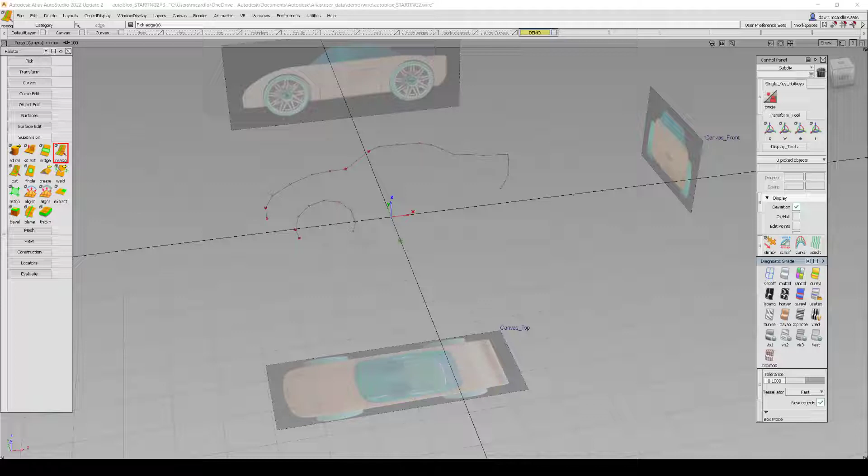I'll start out building the wheels, connecting them with a body side, then the hood, the trunk, then I'll connect all those pieces together for half of the car. I'll mirror it and show you how to do some cleanup and detail work.

So starting out with this curve, I'm going to extrude it, making sure I have curves enabled. I can choose either global or normal within the dialog box, or once I invoke the tool by clicking on the curve, I can do that by switching between global and normal here.

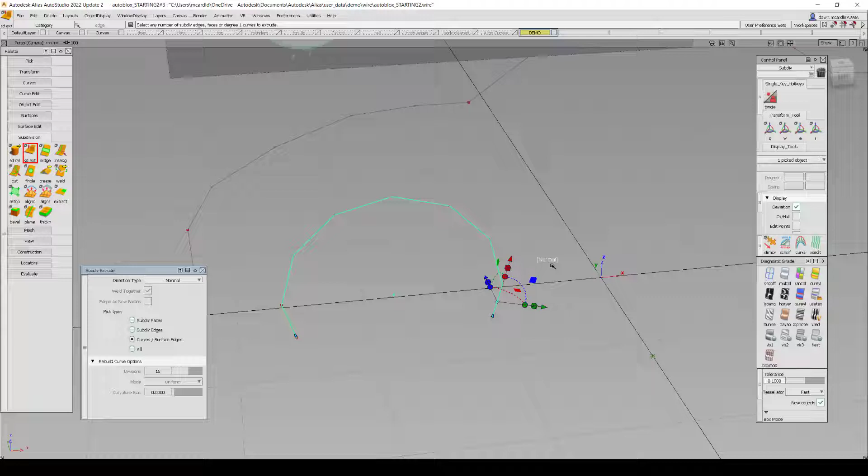In the side view, I'm going to extrude it normal to the curve using the Y direction. So I'll do that once, spacebar, and again, spacebar.

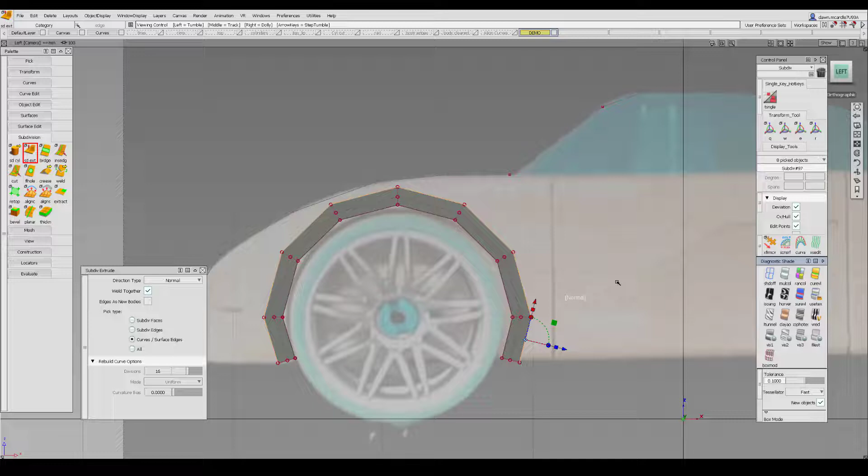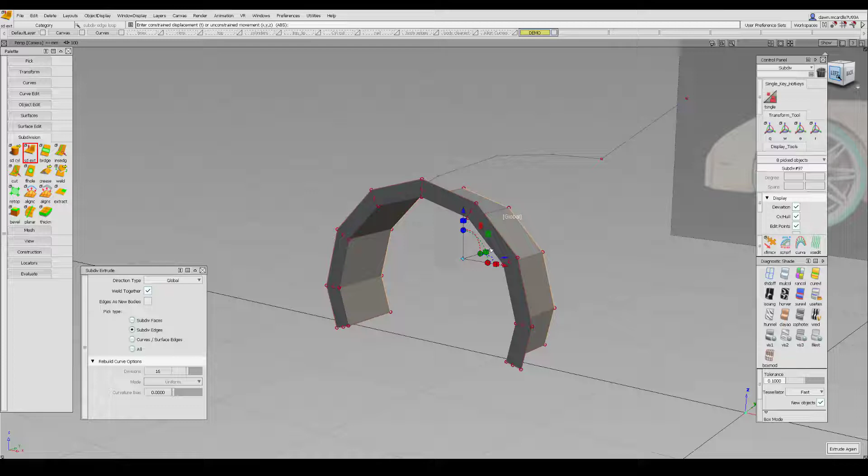I want to continue extruding, but this time I need to select a different edge loop to build the wheel well. So extruding again, I'm going to change this to global, which uses the normal XYZ axes of our world, and I will extrude that back toward the center, checking to make sure it ends where I want it to, and it's not actually built until I hit the spacebar.

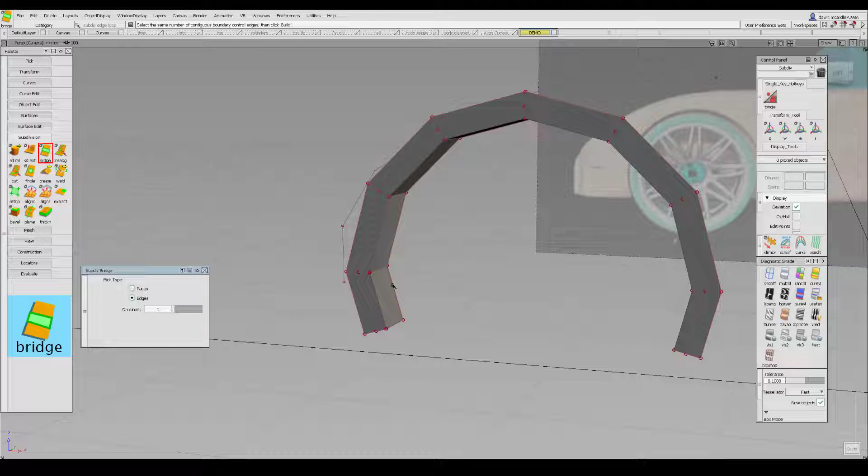To build this back wall behind where the tire goes, I'm going to use the bridge tool. I can do this one at a time, edge to edge, or I can do multiple. So I'm going to select these 3, which I want connected to these 3, spacebar, and now I can select how many divisions I want. 2 is good.

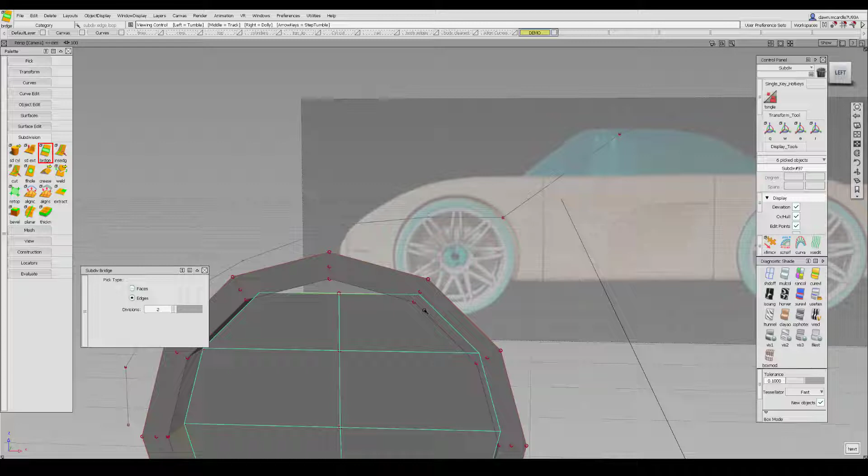And to connect this top hole, I'm going to weld one CV to another using the weld tool. Set to target, I'll select the first one and the second one where I want it to jump to.

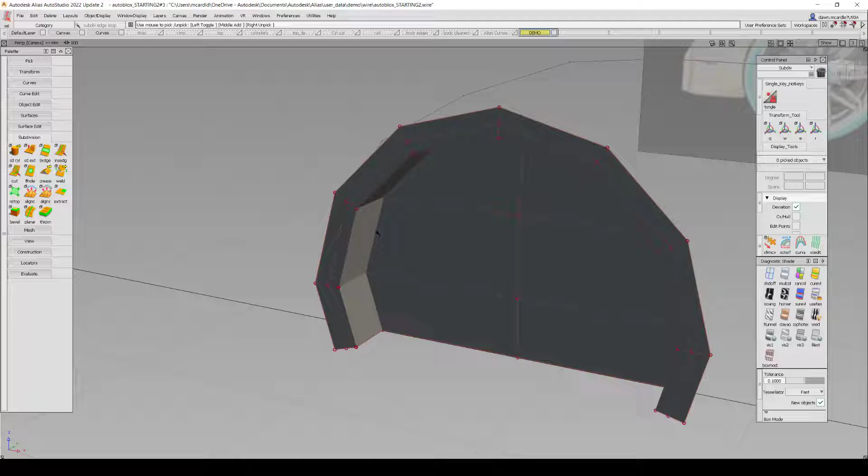Looking in shaded mode, it looks pretty good, but it's too rounded here, so I want to crease it. I'll select this edge loop, the whole thing, and checking in shaded while I do this, I can either crease or uncrease. So I'll click on crease, which gives me a nice hard transition from one face to another.

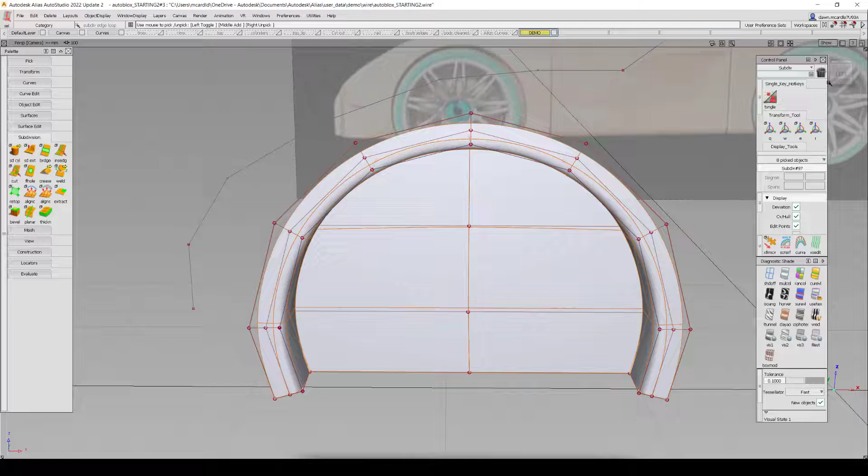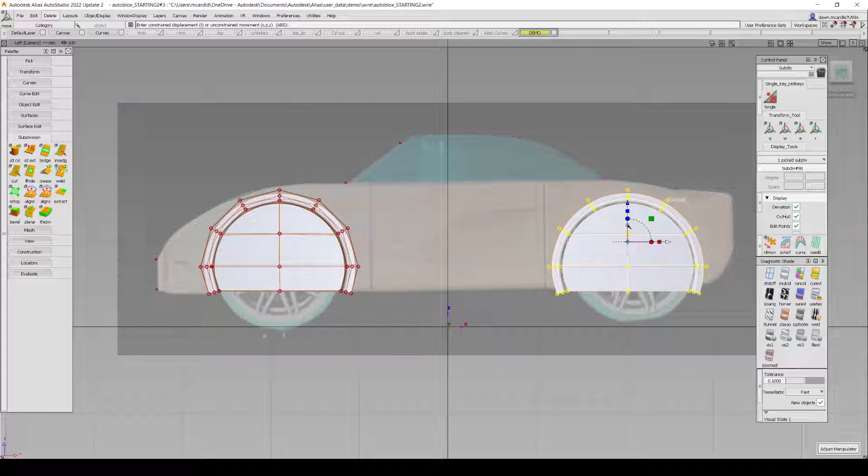So we've built one wheel area, and instead of redoing that, I'm just going to pick this subdivision object and duplicate it. Click the duplicate button and just move this to the rear of the car, moving it up slightly. And now I want to connect both of these wheel areas I've built.

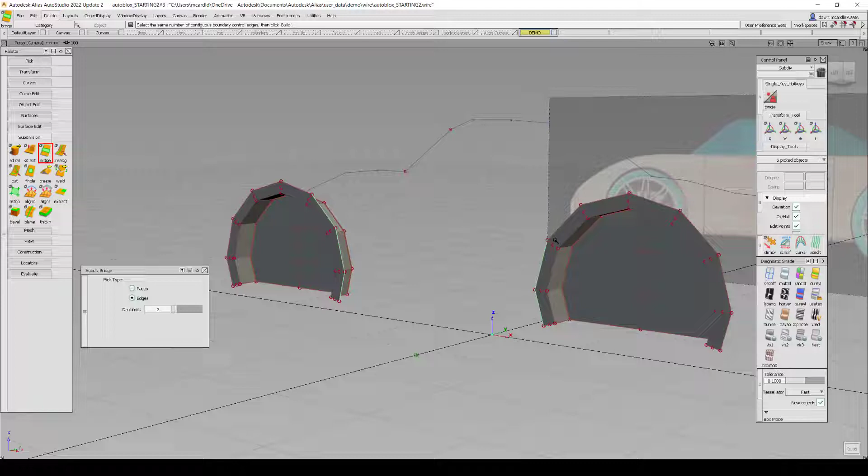I can use the bridge tool again. So I want to connect these first 3 edges to these 3 edges. Spacebar to build, 2 divisions is good. Not bad for just a few minutes work, but we still have more to do.

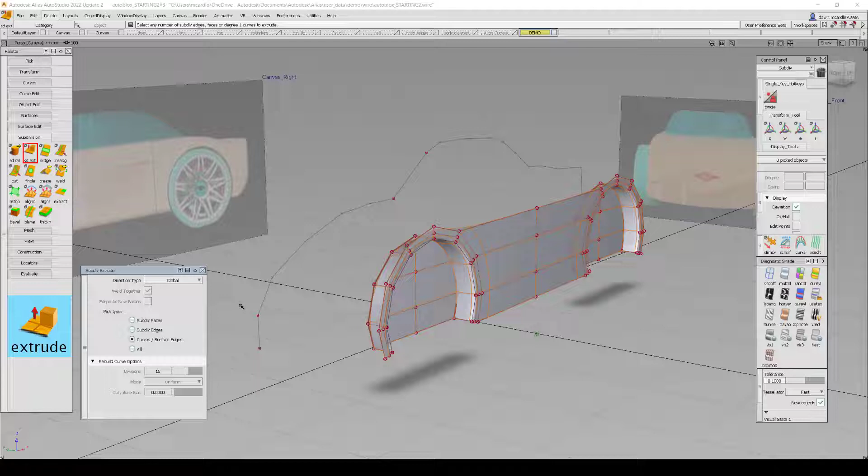So I'm going to continue by building the hood using the extrude tool. Set to curves, and I want to look at this from top view. And on global, I'm going to use the Y translation axis to move it inward, and I also want to rotate it at the same time before it's built to match this character line here.

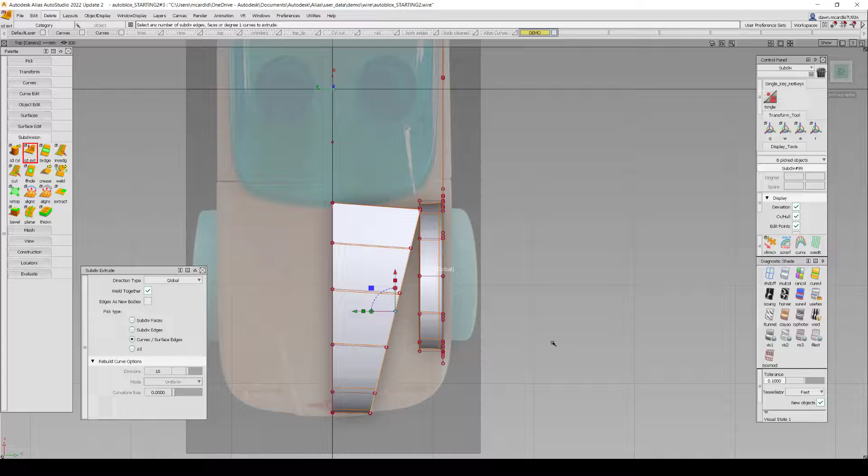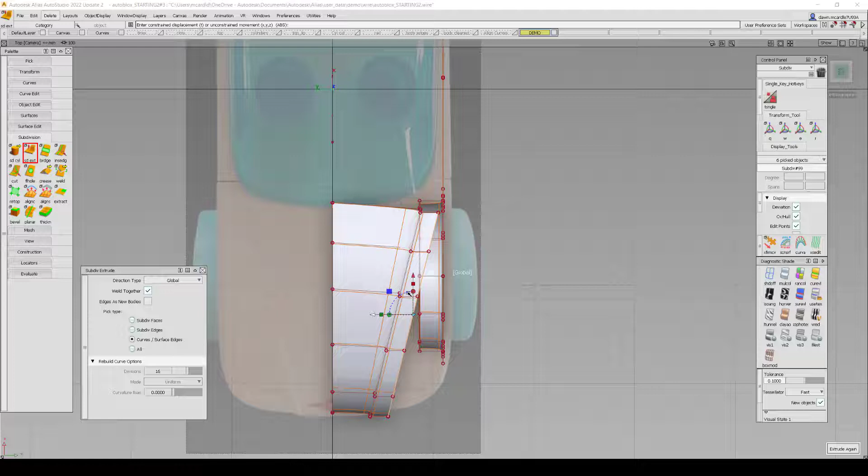Hit enter to set that, and for the next extrude I want to continue by building it upward to give that little crease detail, and forward just a tad, spacebar, and a third time checking in my top view, I'm going to extrude that again while rotating it to straighten it out and moving it to follow the shape of the vehicle, and spacebar to finish.

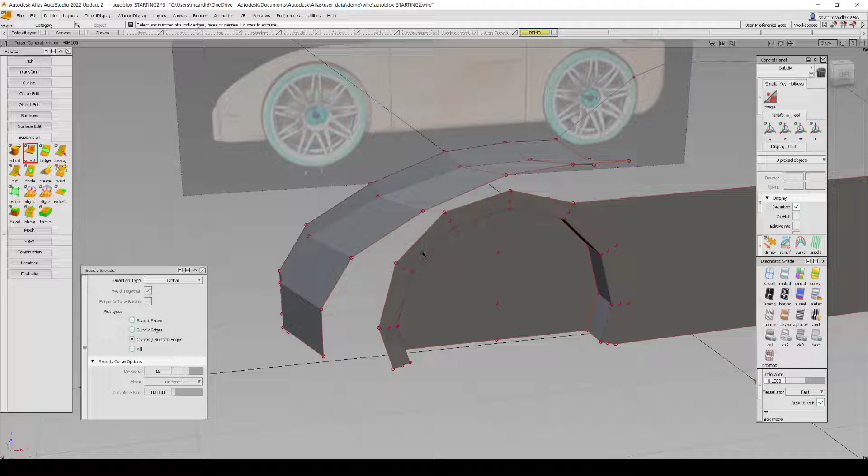You want to try to match the number of edges to edges that you're going to bridge. So using the bridge tool, I'm going to pick all 3, 4, 5 of these, as well as 5 of these I want to bridge to. Hit spacebar. I only need 1 subdivision. It's better to start out with less detail and add more later.

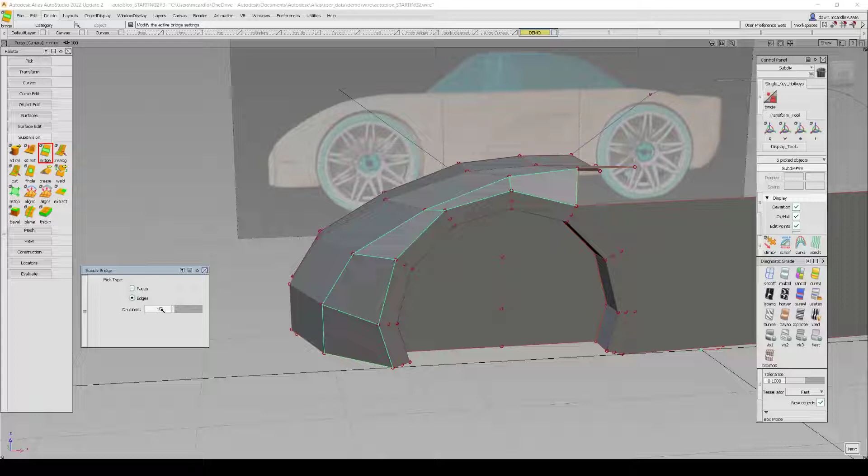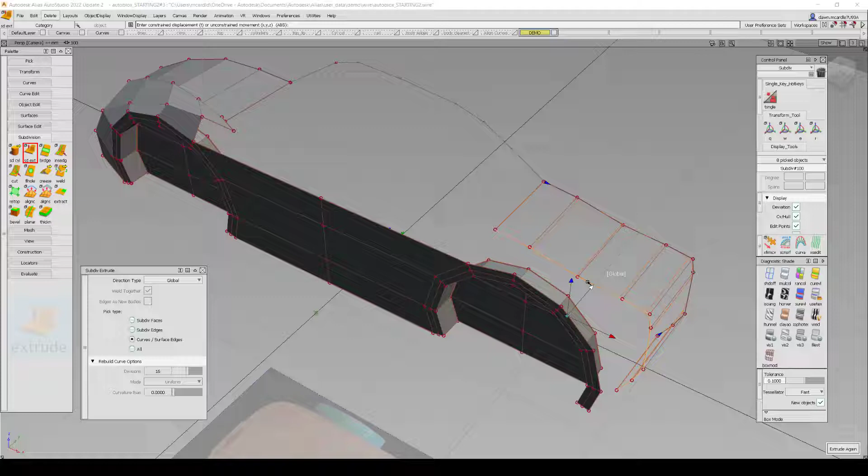And using the same method, I'm going to build my trunk area by extruding this curve, checking where it's going to end up. Close to the corner is good, and spacebar again. The more edge loops I have in an area, the tighter the corner is going to be.

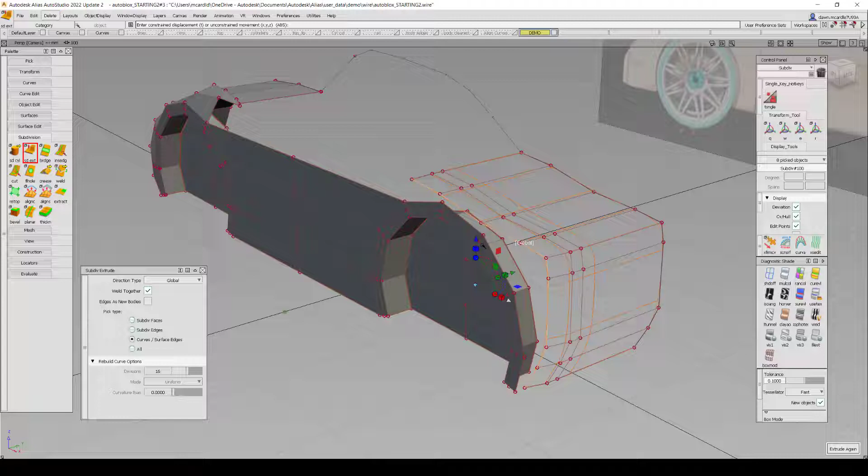And for the third one, I'm going to move it down a bit and forward, as well as closer to this wheel area that we're going to connect next. Just like we did in the front, I can bridge these together. But before that, I want to adjust some of these CVs so that they line up better. You can either use CV slide or transform.

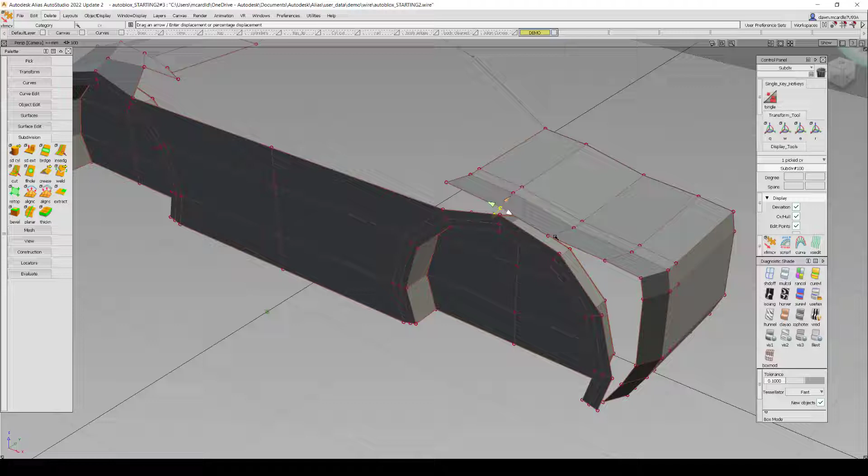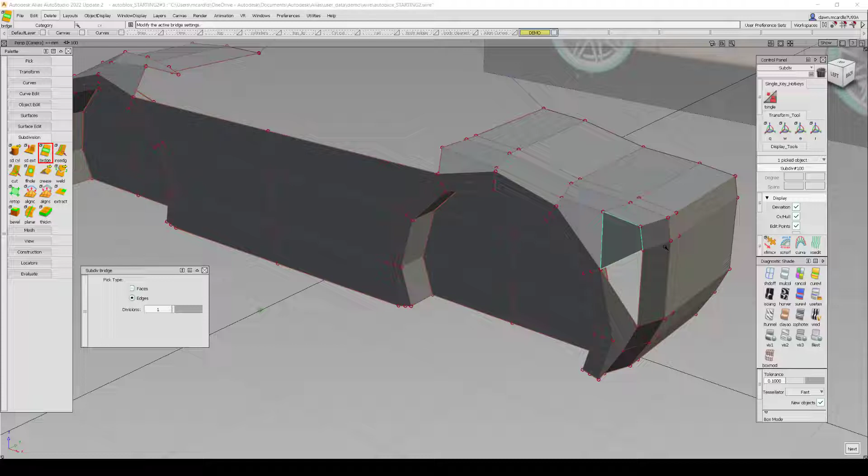I'm going to bridge 1, 2 that I know will work out. Figure this out as we go along, and I will bridge these 2. This doesn't line up, there's more on one side than the other, so I'm going to figure that out as we go. So I'll just do these last 2, bottom 2. And I see that leaves me with 3 sides which I can bridge this way. And now I'm left with a triangle that I've got to fix.

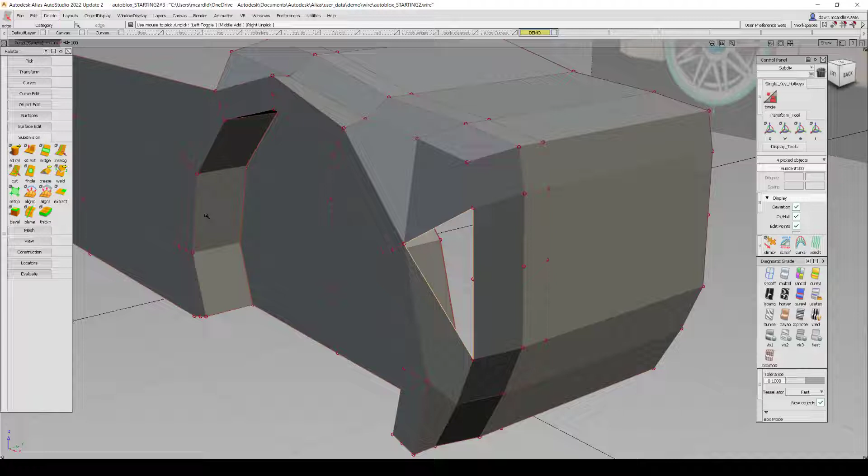One way to remedy that is to insert an edge, and I can either use parallel or perpendicular, which just depends on where I want to click. Parallel is fine, so I want to insert an edge right here, and that will leave me with 1, 2, 3, 4 edges, which legally I can turn into a quad by bridging. And there we go.

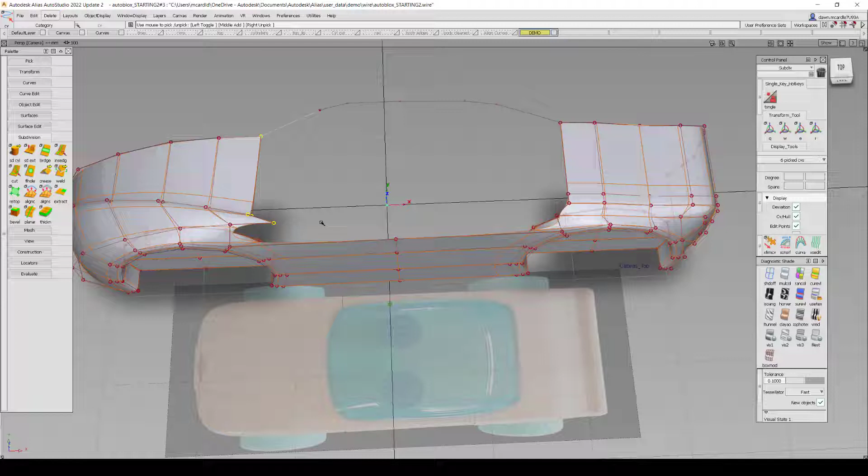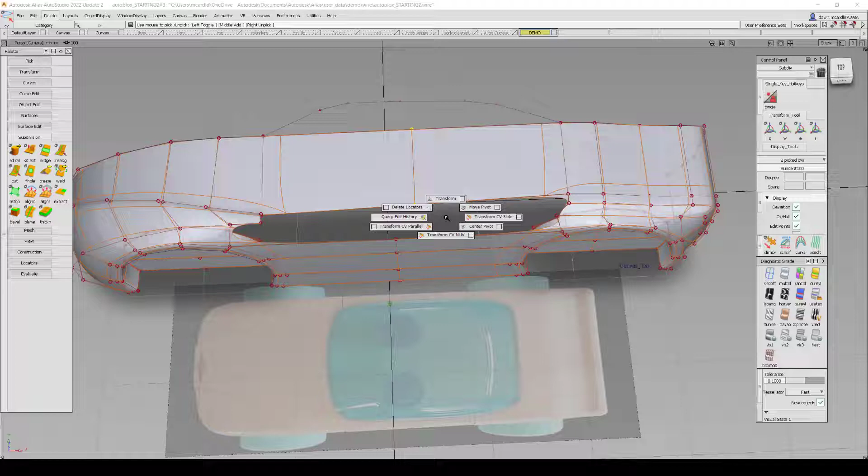Next, I want to connect all these together, but first, as we go along, I want to straighten out some of these CVs, transform non-proportionally scale those, and I can bridge the front to the rear. I'll add a subdivision in there and pick these CVs and move them so they'll line up a little bit better with the body side CVs.

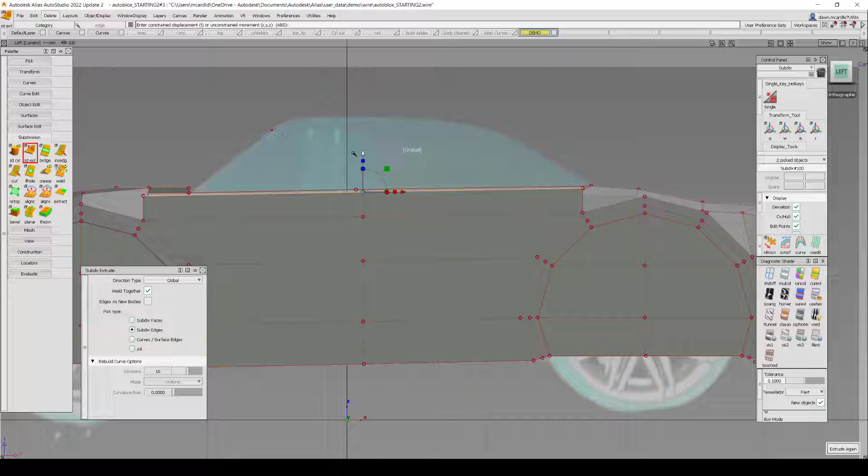Working in box mode, I want to bring these edges up, so I will extrude them globally up, checking in my side view to make sure they follow the belt line. Spacebar to set those, and I'm going to use my weld tool to target to connect these CVs that are close together in the front and the rear.

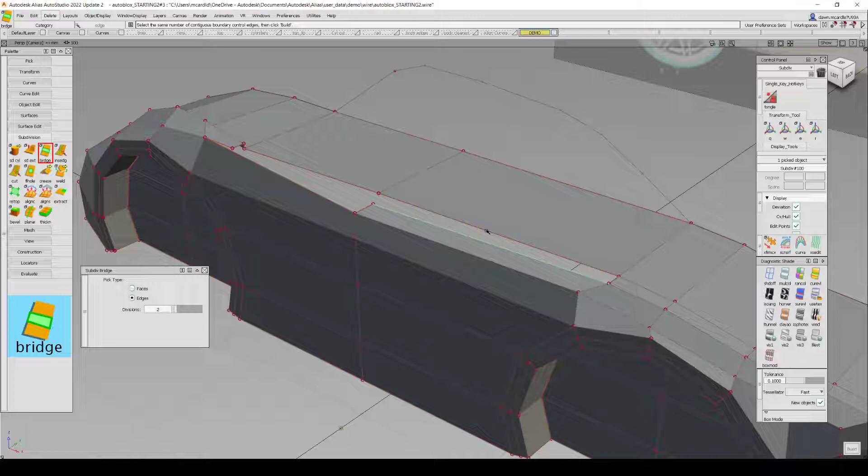And I'm going to pick this edge, and I want to extrude that closer to the center of the car, and I want to weld these CVs together, which leaves me with enough edges to bridge with 2 subdivisions. And as you go, just adjust your CVs as needed.

I want that a bit more like that. And in the same way, I want to work on filling this hole here, but I have nothing to connect to, so I need to insert an edge. So I'll go to perpendicular and create an edge here so that I can connect and weld these CVs.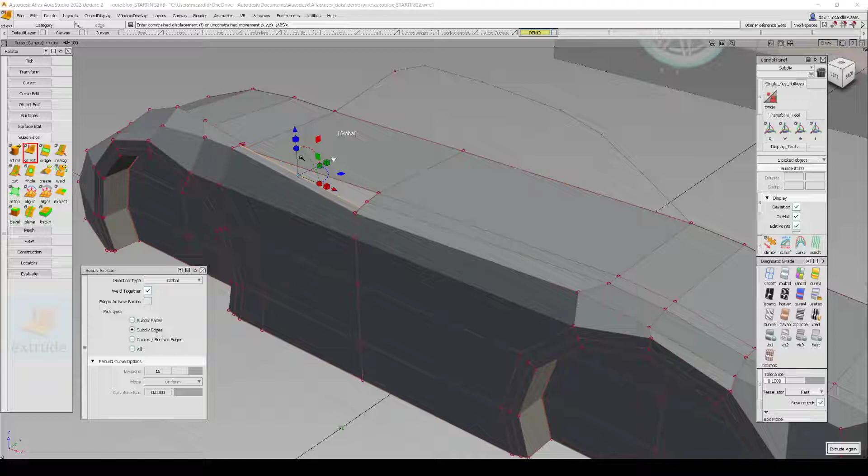Just like I did in the rear, I want to extrude this edge closer to center. And I want to weld the closest CVs, these, and turn to see what I'm looking at a little better. And I want to also weld these.

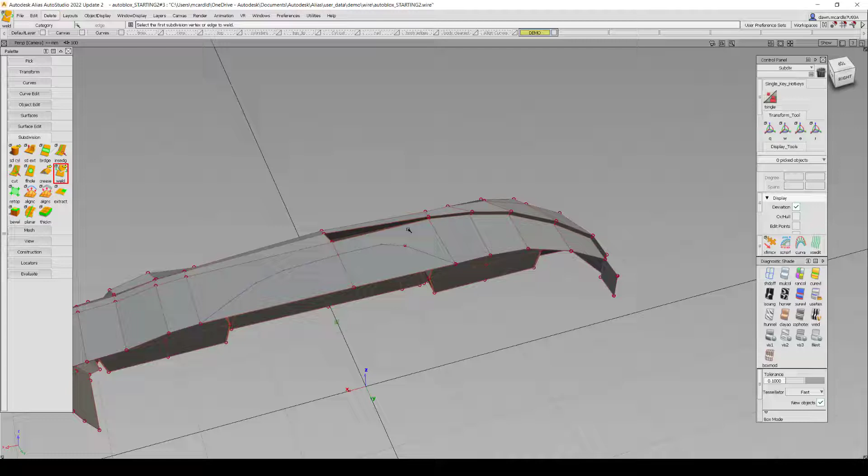Alright, so if I look at my vehicle from here, I have 4 edges that I could turn into a quad, but I know that I want to sharpen up this detail here, this crease in the front. If I insert edges, they're going to go all the way from the front to the rear of the vehicle, and that's going to give me more detail than I want. Plus I want this to fade out.

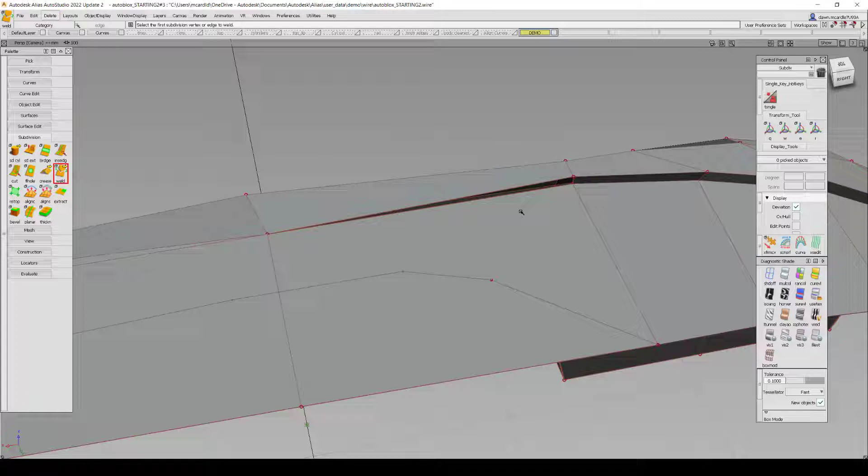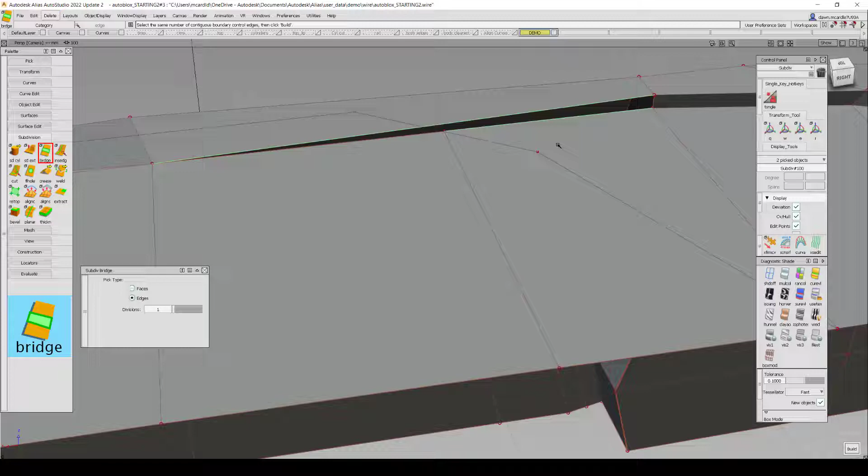So instead of bridging these, I'm going to weld these so this detail will fade out, but that's leaving me with a triangle here. So what I can do to get out of this pickle is insert an edge down here, which, even though it looks like a triangle, it technically has 1, 2, 3, 4 sides, which allows me to bridge it. And there we go. So let's take a look at what we've got.

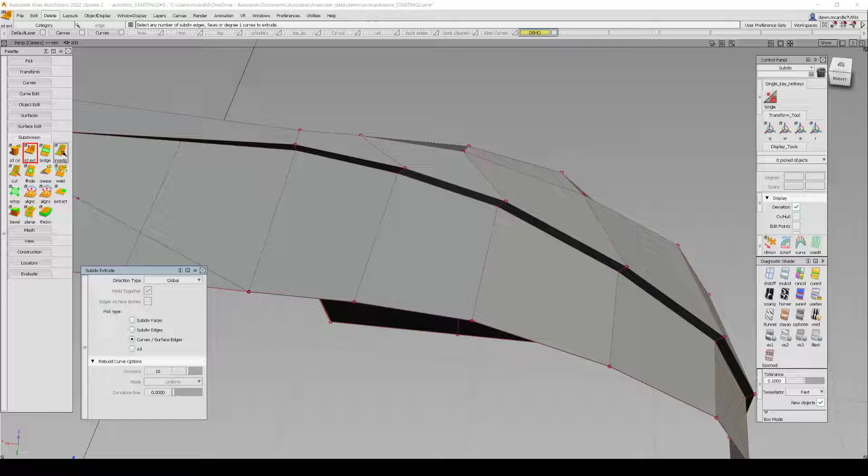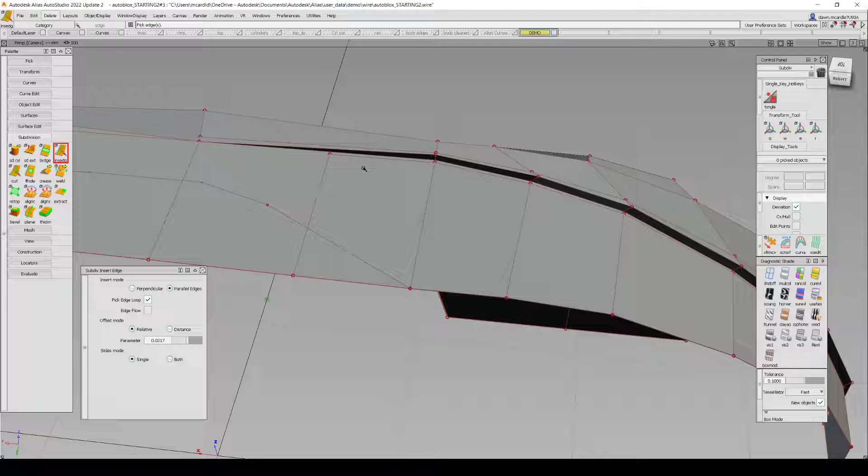Okay, not bad, but this is too curvy. I want a tighter transition. So I will insert edges here. And also here, spacebar. And now they don't go all the way from the front to the rear, but they do end, which creates n-gons, because where I had a quad, now it technically has 1, 2, 3, 4, 5 edges.

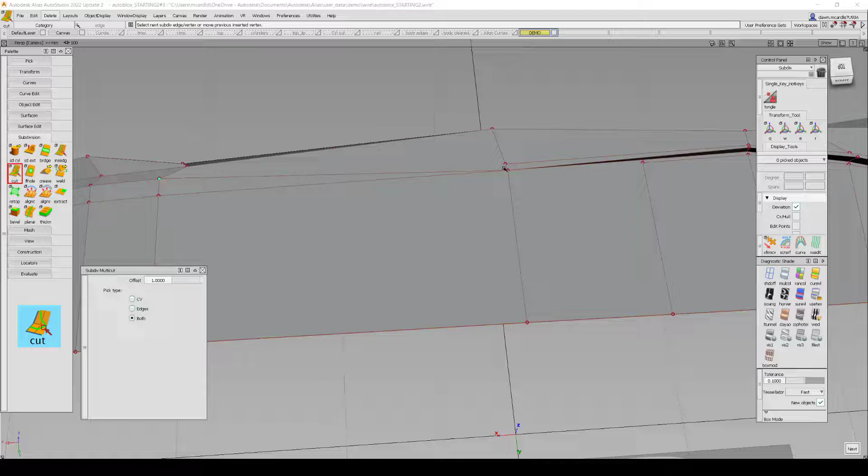Let me turn off my curves. So I need to fix that. And since I did weld these together, it also left me with another triangle here. So I can use the cut tool, cut from here to here, and then I have an extra edge that I can just get rid of.

So now I've got a legal quad here, and I need to fix this one, so let's try using that cut tool again. And I'm using my control to snap to these existing CVs.

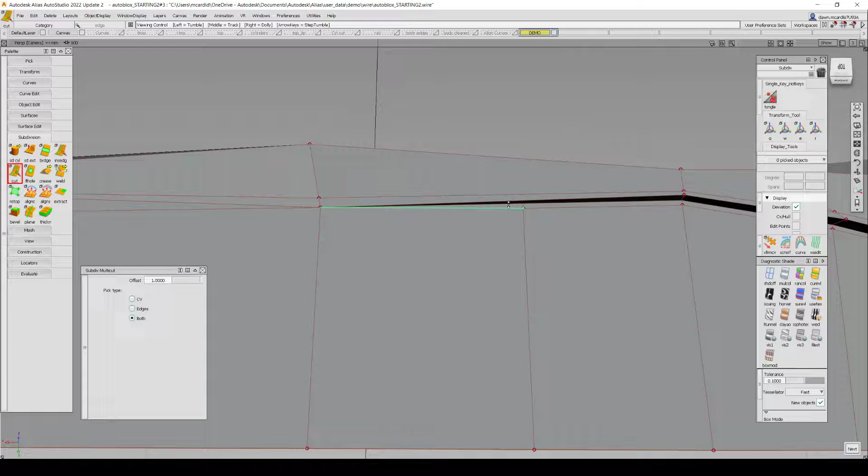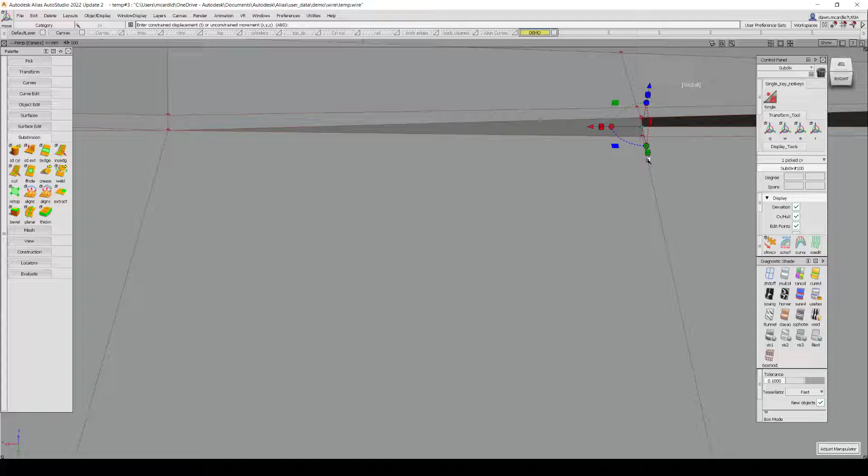I can cut all the way back to my body side, and then I can pick this edge here and delete it. So again, I've got a 4-sided quad, even though it looks like a triangle, and I might want to pick that CV and just adjust that a little bit.

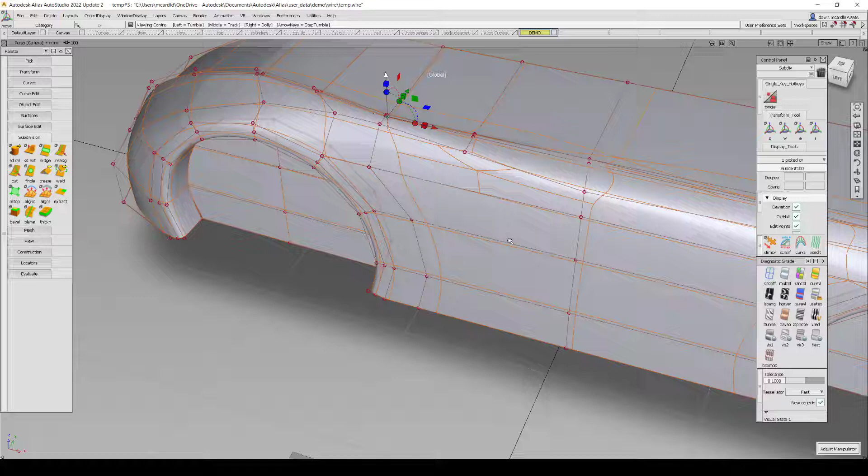And even the next one, so that crease is fading out. Let's see how it looks. Alright, and the one thing that I didn't finish up in the front is I need to continue that cut. See, we've got an n-gon here, so I just need to continue that cut all the way down to the bottom, which should correct it. Yes.

I should point out that you don't always need to spend time chasing an n-gon or triangle. It's something to look out for when looking for the source of unintended reflections, but in the end, if it looks right, it is right. So looking at this area, I can see that this edge looks very zigzaggy, and there's a tool we can use to help alleviate that.

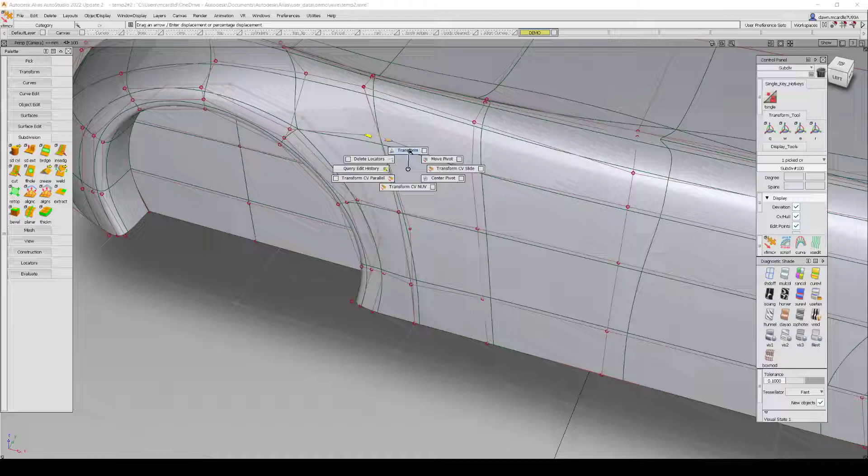First, I'm going to pick the CVs that I want to adjust and align. And then there is an Align to Curve tool, which allows you either to select a curve that you've created previously or to just generate one based on the position of these CVs. So I'm going to hit Generate Curve, and you can see that it straightened out this edge loop pretty nicely. And of course you can go and adjust further if you choose to.

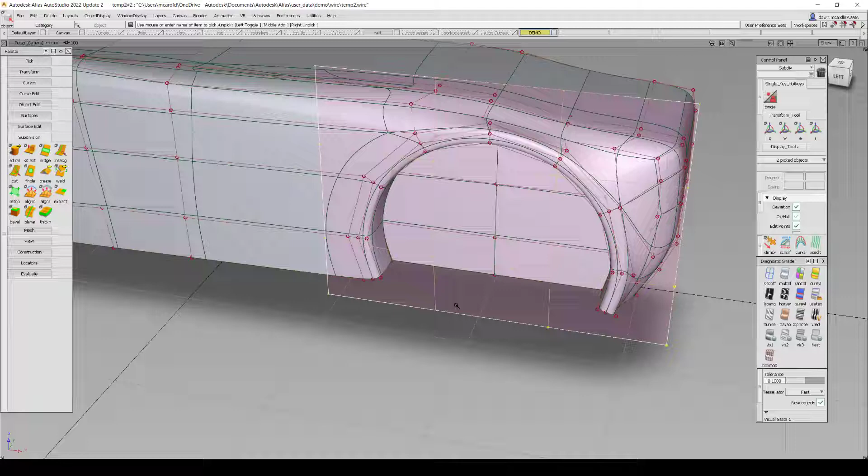In the same way, there's a tool that helps you adjust your CVs based on a surface. So I've already built this rail surface, and I'm just going to move this away from the vehicle a little bit so when I demonstrate you can see all the CVs I pick are going to align themselves to this surface. So I'll hide this rail for a moment and pick these vertices that I want to move.

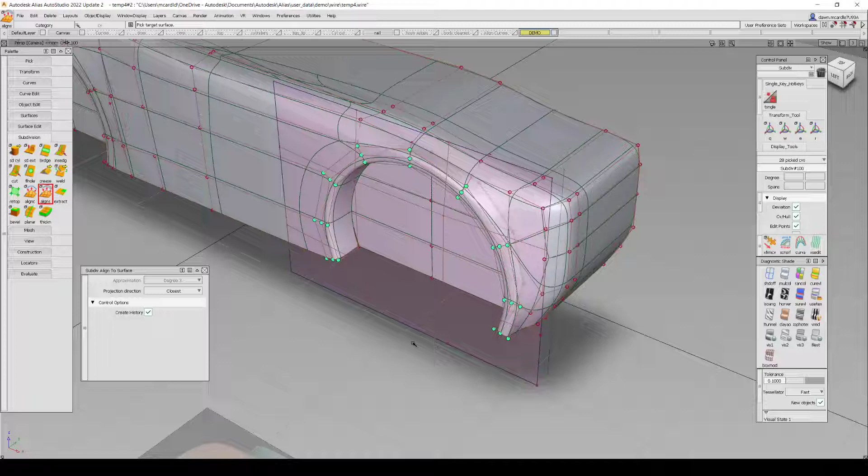Make that rail visible. Choose Align to Surface. Since I've already created one, rather than Generate, I will say Align to Surface, and then click on it. And you can see that those CVs I had chosen have now moved to align to the position of this rail. I could also pick some of the CVs on that rail itself and move them, and my subdivision object will follow.

I'm just going to undo, and if I want to no longer have this rail controlling my subdivision surface, I would have to delete construction history. I'm going to hide that rail, and I just wanted to make you aware of some interface tools that might help you out.

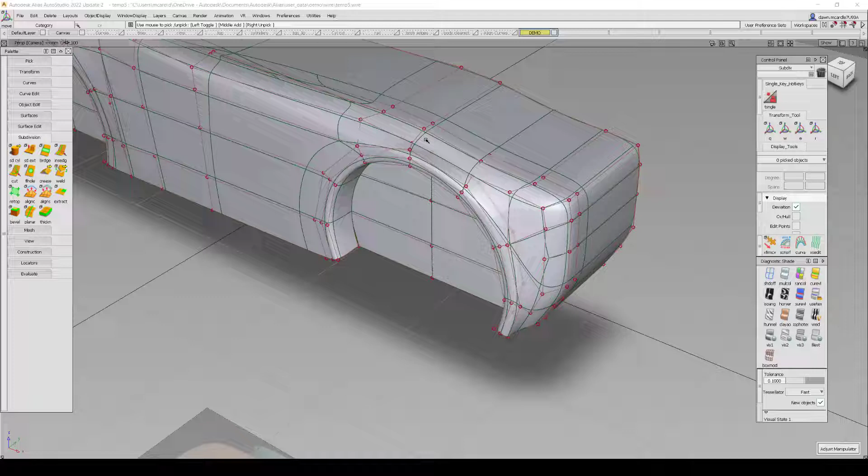So had I selected the wrong CVs, then the wrong ones would have moved. And sometimes it's hard to see because I've got this X-ray on where I can partially see those that aren't sitting right on the surface. So you can have a little bit more control over that by going to the X-ray options under Window Display.

Right now it's at 0.15, which means partially transparent, but I could change that to 0 and say Go, and now I can no longer see those CVs that I might not want to pick because they are not what the camera is looking at. In the same way, I could do this for hidden line if I don't have shaded on by clicking Turn On. And now the CVs that the camera is not directly looking at are occluded.

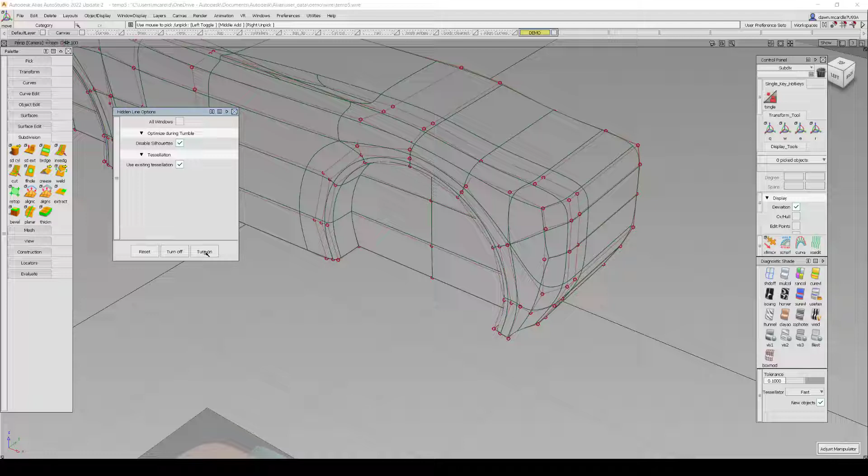I'll turn that off, and I want my X-ray back on. If I were to put that all the way at 1, it would be as if you could see the CVs all the way through the car. So I'll put that at 0.15, which is the default.

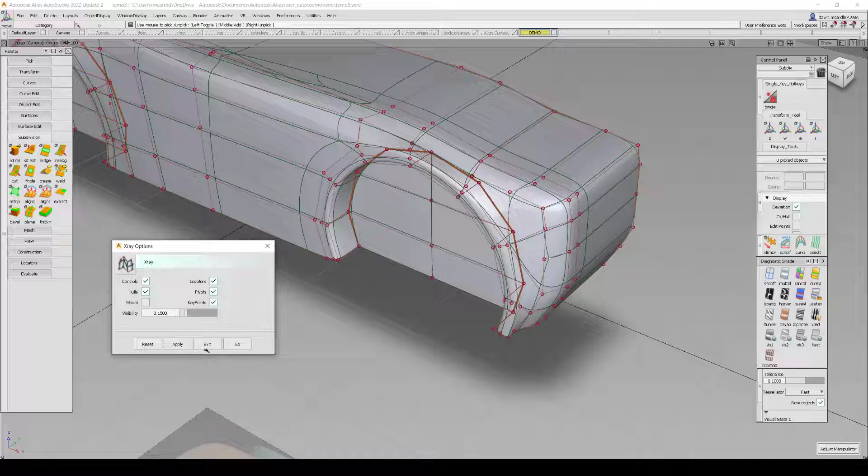And now I want to mirror this over to the other side so that we have two halves of our vehicle. So first I want to make sure the CVs truly are on center line. And if I pick them, I did pick all the ones from the front to the rear, even though I can't see them. But another thing you might want to be aware of is under Preferences, Selection Options, you can enable camera-based selection.

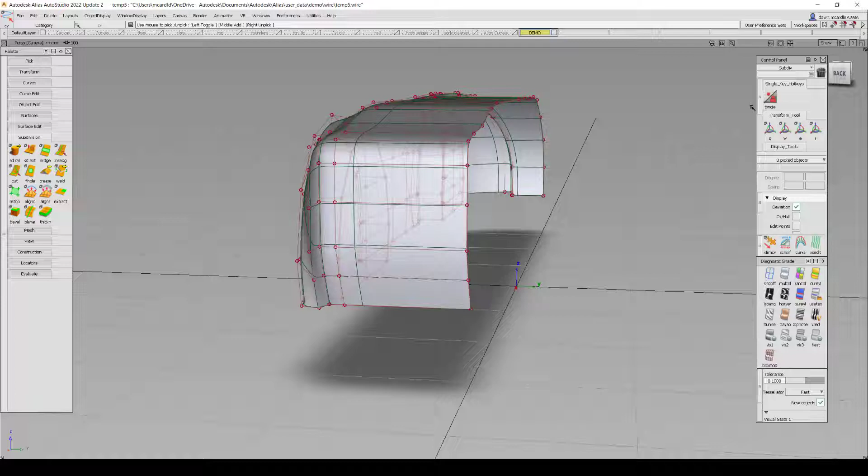You can choose that to work for shaded or both shaded and wireframe. So if I say Go, and now in my back view I pick the vertices, and I take a look at what it really picked, it's only picking what the camera saw. So sometimes that's useful, and in this case it is not. So I'm going to turn that back off.

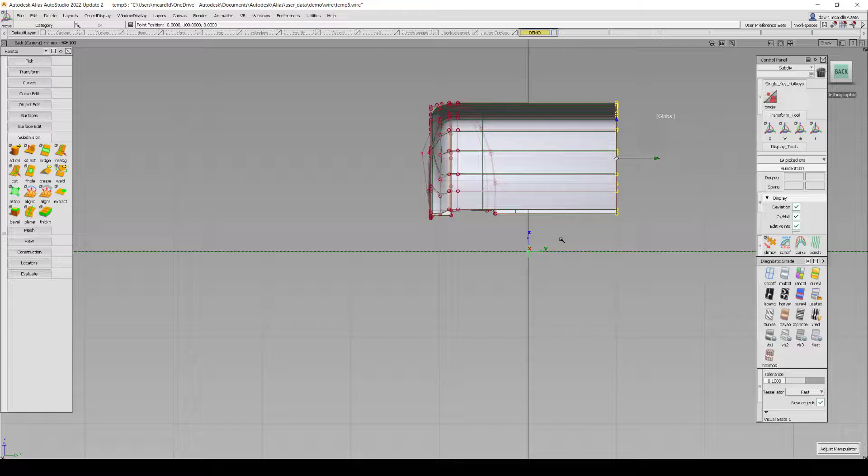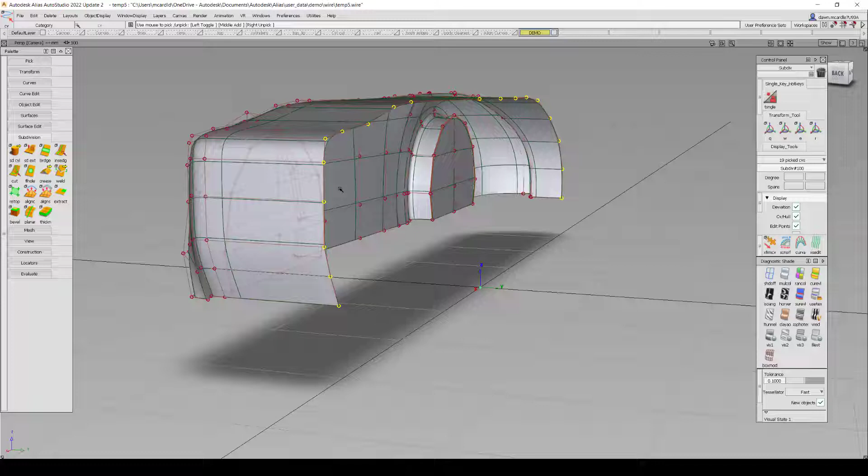I'll pick all my center vertices and make sure they're truly on that grid, using Alt to snap them before duplicating this object. To figure out which axes to mirror on, in VRED I would do it along the Y, but in Alias I need to pick the opposite two, which would be Z and X. So with that object selected, I'll say Edit, Duplicate Mirror, make sure it's on the correct axis, and say Go.

So right now I've got two subdivision objects, and I want to make these one. If I weld these CVs on the centerline, I'll have the correct continuity connecting them. I'll enable my weld tool, set it to tolerance, and pick all these center CVs. Now I have a single subdivision object.

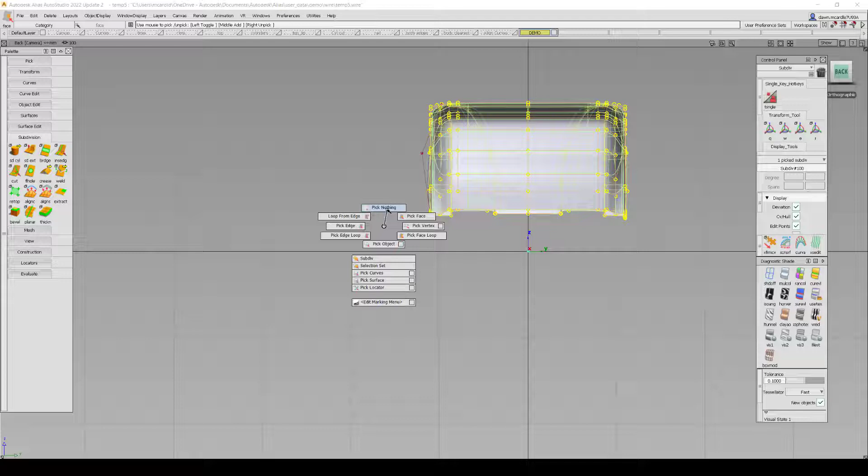If I wanted to separate faces from a subD object, I could just pick those faces and go to the Extract tool, which allows me either to keep original, which makes a duplicate, or leave that unchecked. When I say Go, I've extracted those faces you had selected. Again, I'm just going to weld them back together.

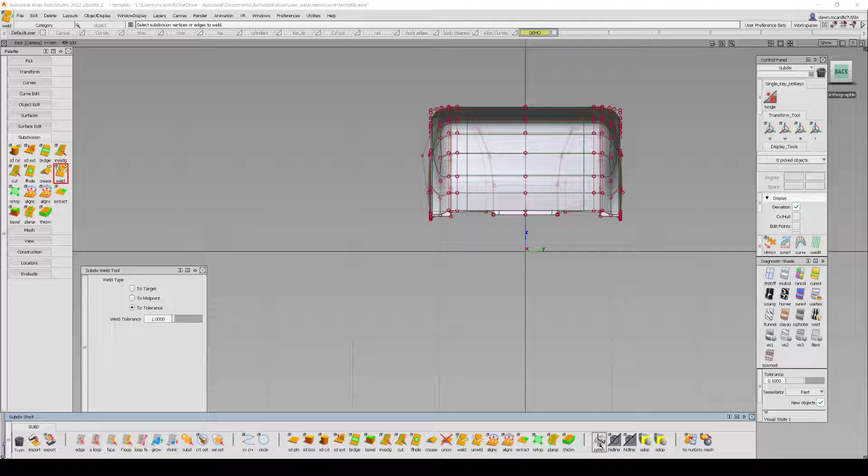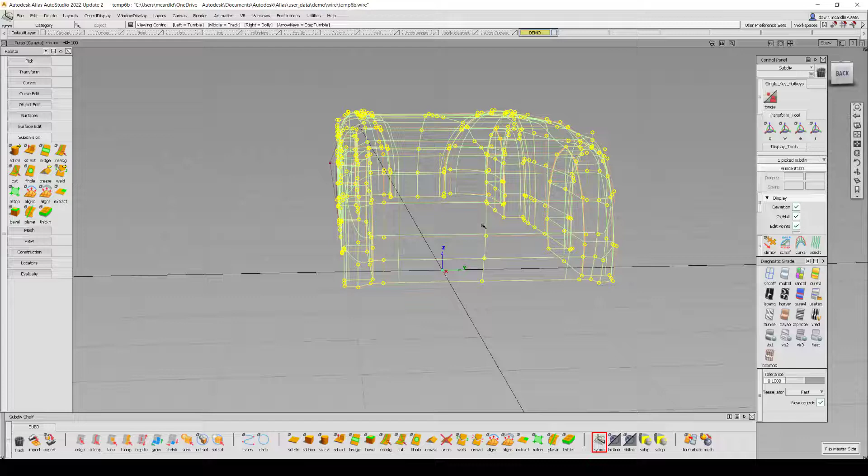You could have chosen to work with symmetry in your layer, or in your shelves there's this symmetry tool, which if I click on it, asks me what I want to add symmetry to. I'll pick my subdivision object, remove construction history, and if I look at this in wireframe, you'll see this dotted square, which means I have symmetry on. Now if I do something on one side, like pick some CVs and move them, the same thing happens on the other side. So while I'm in here, I'm just going to scale those.

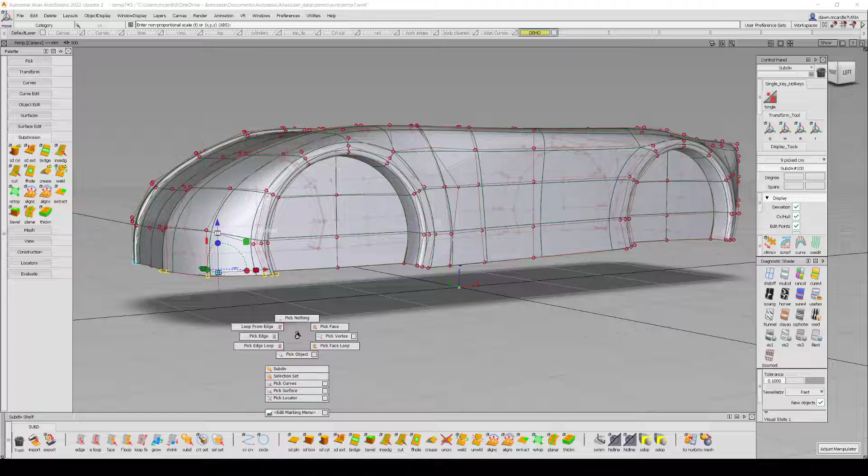Then I just want to start working on building an undercarriage so that if I render this, I won't have light leaking. So just correcting a couple more things here first. Working in box mode, I'm going to delete this curve - I don't really need it anymore from when we were aligning.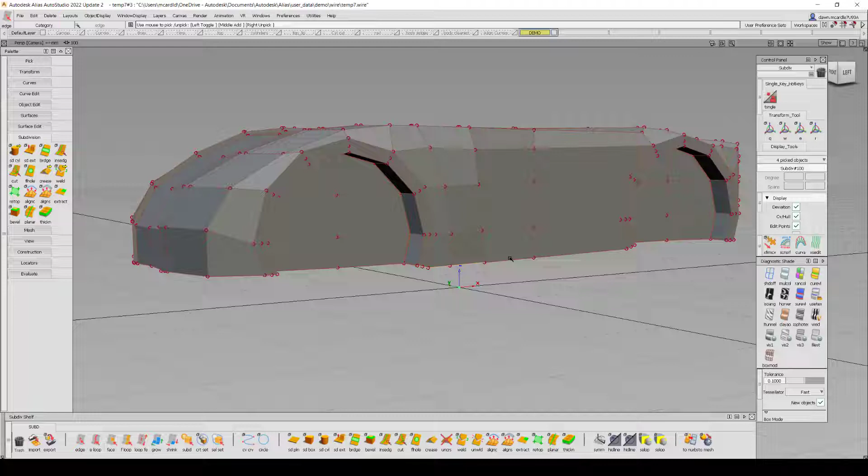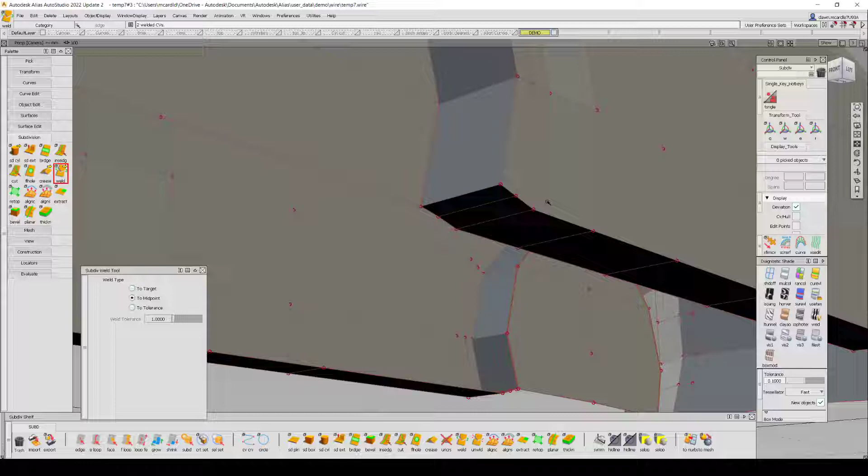And I'm going to select these edges here on the front, body side, rocker panel area of our vehicle, and now extrude those back. Then I want to weld - to midpoint is fine - these CVs close together in the front and also in the rear. Just do it to target because it might be a little too far away.

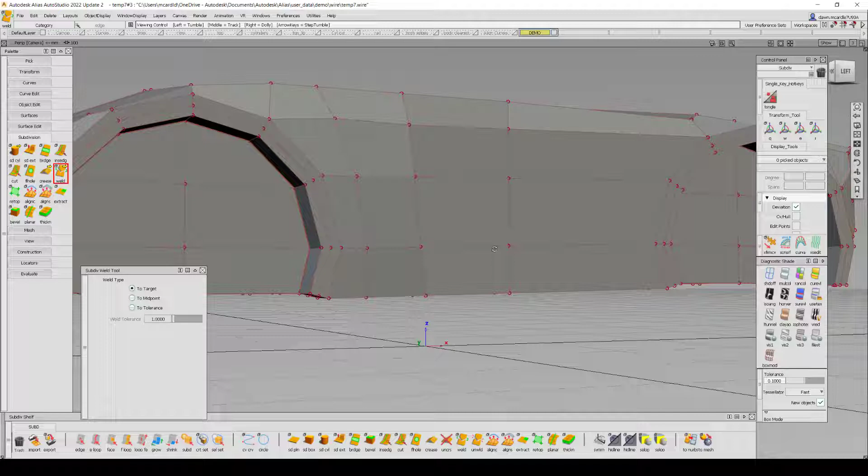There we go. Now I can use the bevel tool. First I will select these edge loops, all three of them, and use my bevel tool. You can just drag in your window to affect how large that chamfer is.

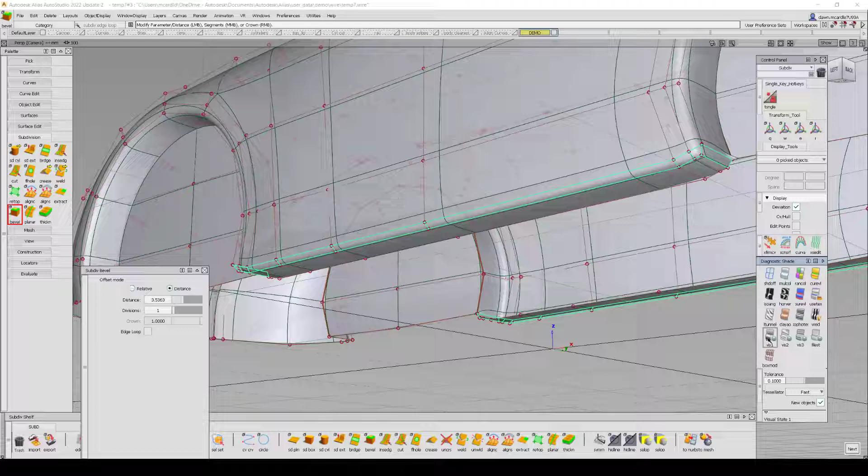Now I just need to bridge these, so I will connect this edge loop to this edge loop by selecting them and then saying bridge, build.

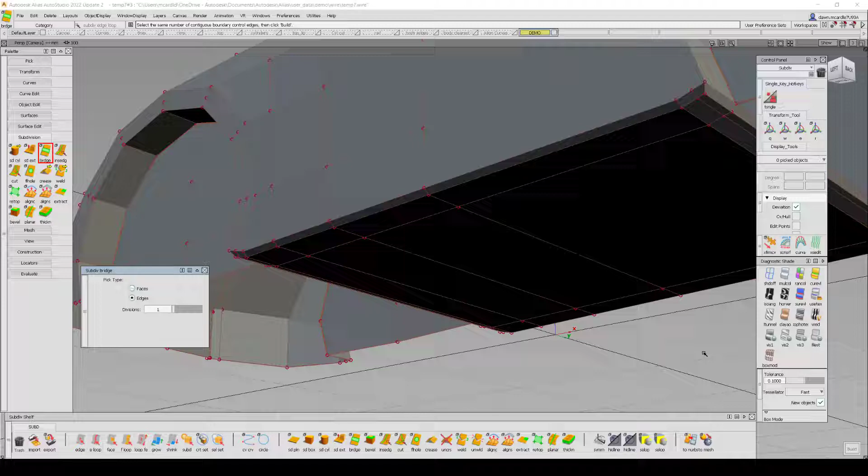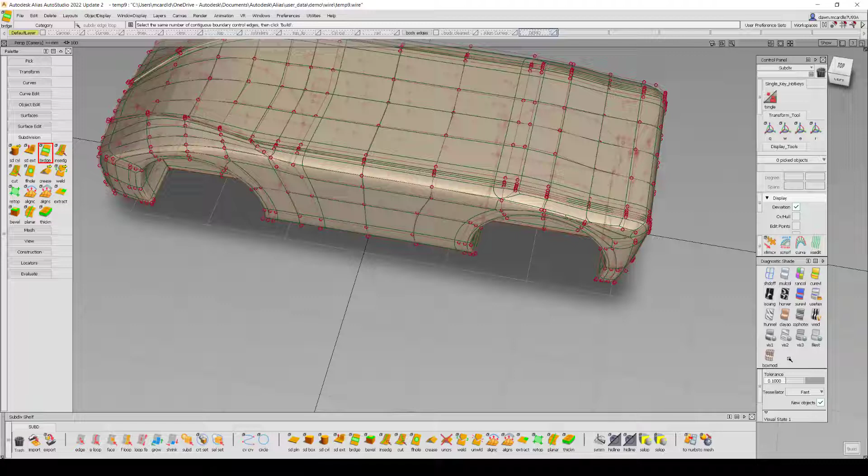I'd like to show you one more tool, but before that, I want to show you some other versions - every time I do this demo, it turns out a little bit differently. In this version, I inserted edges on my quads, and they went all the way through my vehicle to the rear. You can see I end up with a lot of extra information here, and if I were to inadvertently move a CV or an edge, I might get a ripple or a wobble. So there is a strategy to this, and you'll find what works best with practice.

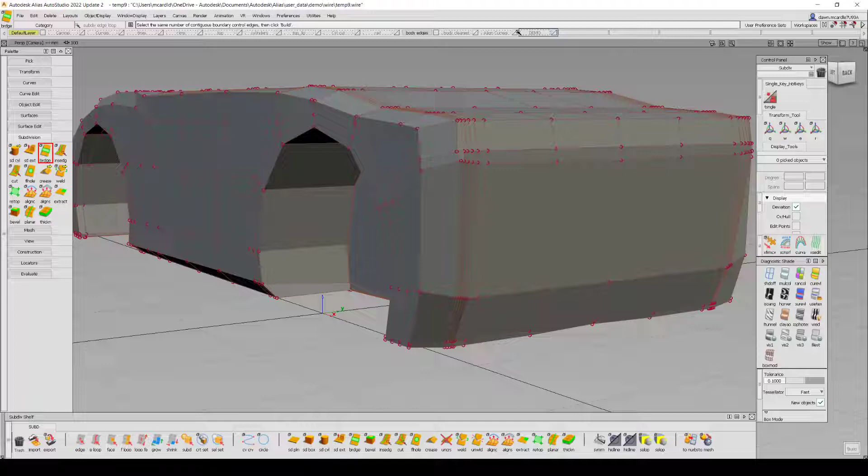Here's a version where I took a little more time to build these details more accurately to the design intent I was trying to achieve.

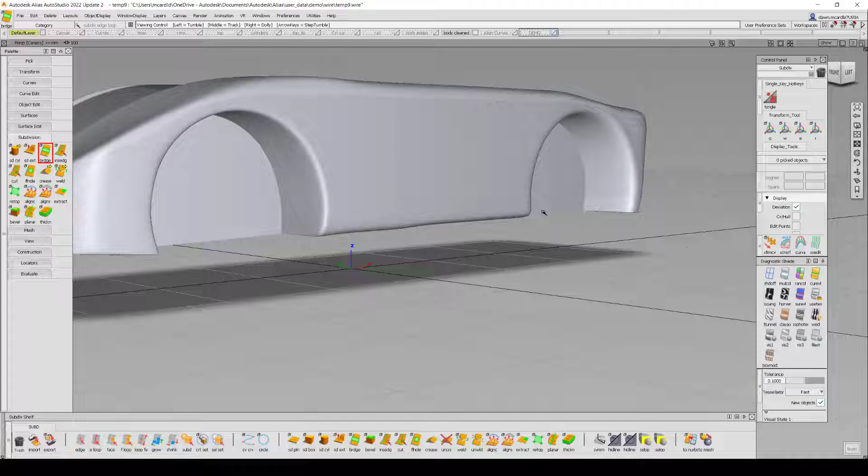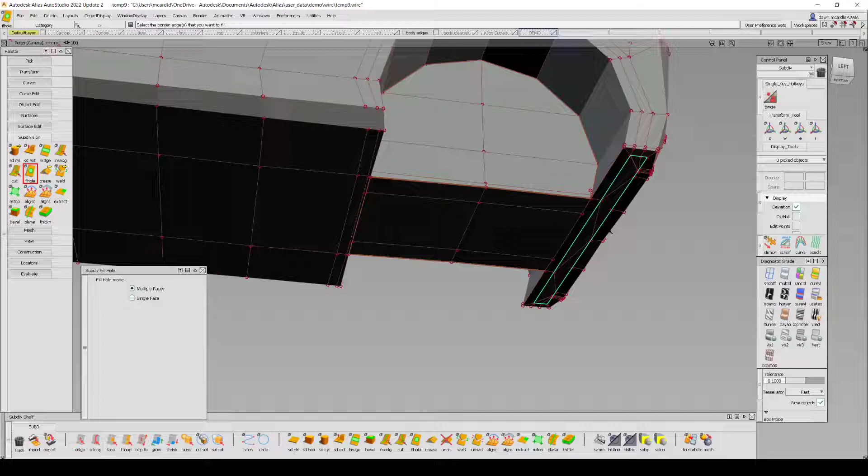I left a hole here to show you that there is a fill hole tool. If you get an odd shape and you're not sure how to quickly fill that in, you can use this tool and choose either multiple or single faces and just click anywhere on that, and it fills the hole in. I'm not too concerned about having n-gons on the bottom of my vehicle.

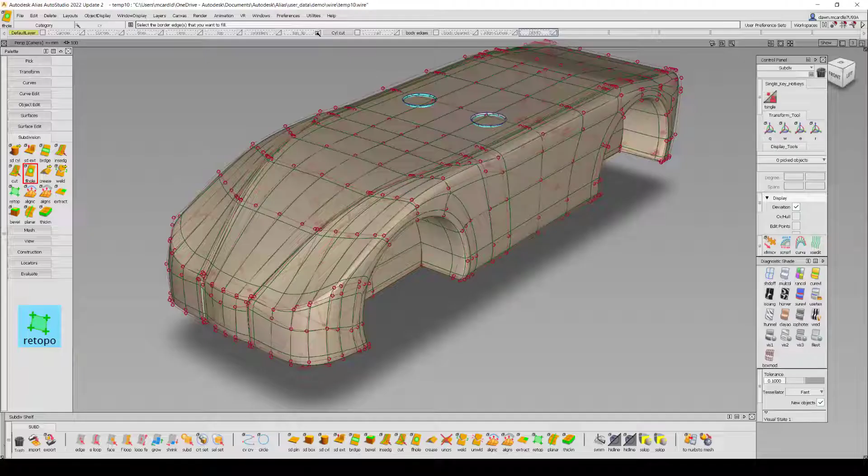There are many different ways of working which will allow you to arrive at a similar result. In this presentation, I've shown you almost all the tools in our subD toolbox. In a subsequent demo, I'll show you how to add details to this model, including the retopo tool, which works nicely with scan data, and also how to incorporate some traditional NURBS building methods using a hybrid technique.